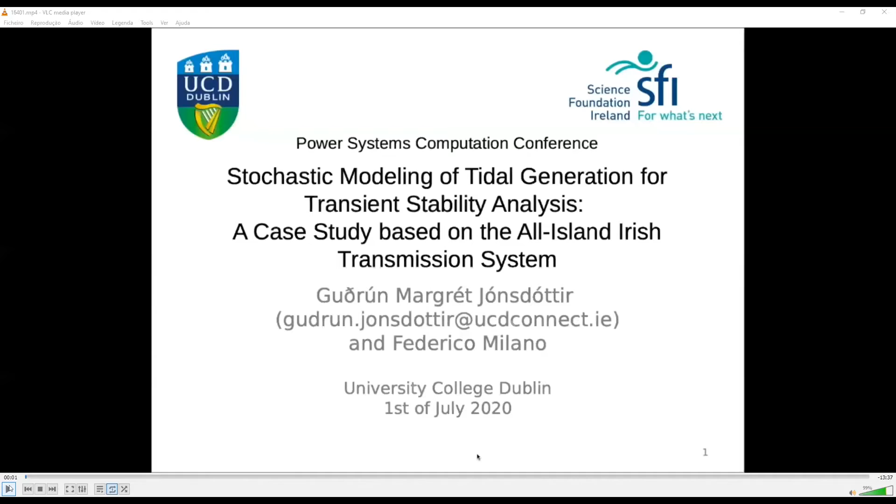I'm Margrét Jónsdóttir, and I'm a PhD student at University College Dublin. Today I'm going to be presenting our paper titled Stochastic Modeling of Tidal Generation for Transient Stability Analysis, including a case study based on the all-island Irish transmission system.

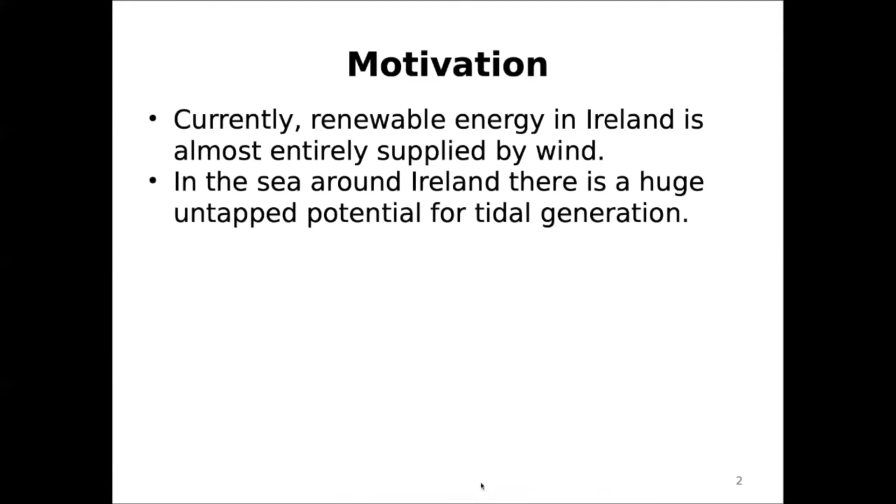Currently, the renewable energy in Ireland is almost entirely composed of wind generation. However, in the sea around Ireland, there's a huge untapped potential for other energy sources, specifically for tidal generation. This brings us to the objective of this paper, which was to provide a comparison of these two renewable energy sources, wind and tidal generation, when it comes to the dynamics of power systems, specifically in the case of the Irish system.

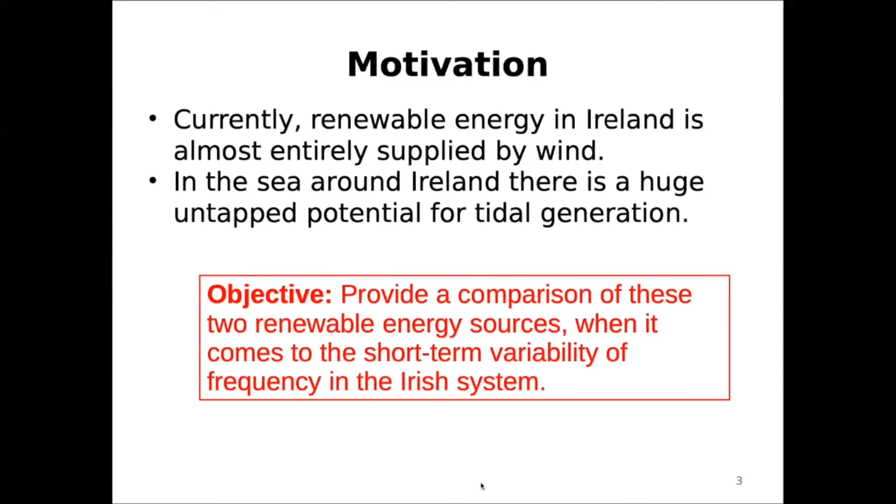Since tidal generation is not that well known, I thought I would start with a brief background on tidal generation. Tidal turbines extract energy from ocean movement due to the tidal phenomena, which is caused by the sun and moon's interactions with the oceans of the earth, causing large bodies of water to move to and from coastlines with periodic cycles. These tidal currents are predictable, very predictable, months or even years in advance, which is one of the driving factors for tidal generation.

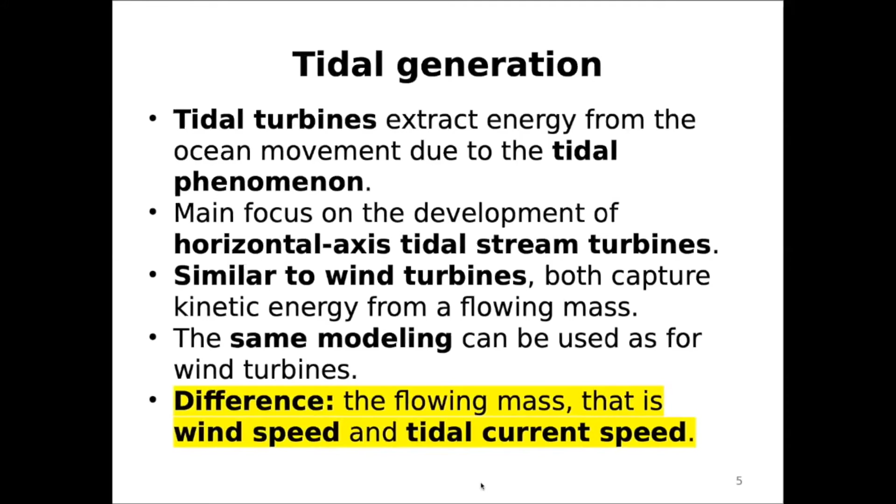Many different technologies for extracting tidal energy from the tidal phenomena have been proposed in the literature, but the main focus of development has been on horizontal axis tidal stream turbines. The driving factor for this is that these turbines are very similar to wind turbines, and therefore can be modeled in a similar way. The main difference for dynamic analysis of power systems between tidal and wind generation will be in the flowing mass that produces the generation, that is, the wind speed and the tidal current speed.

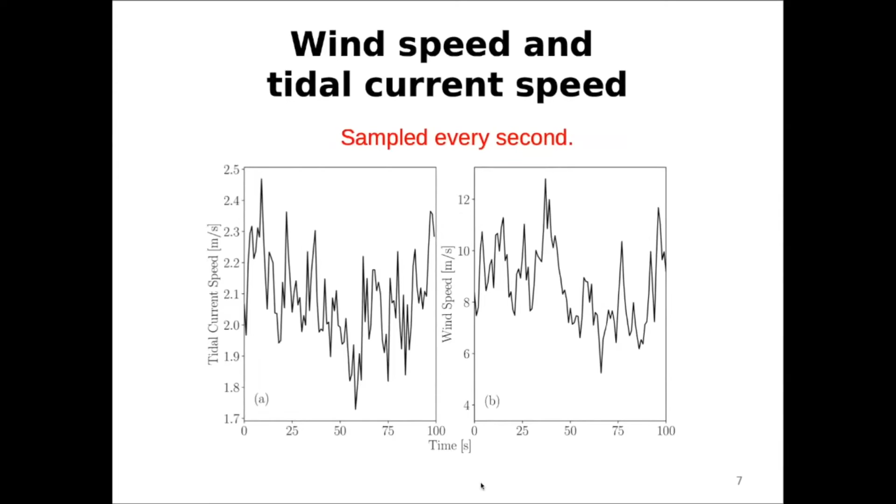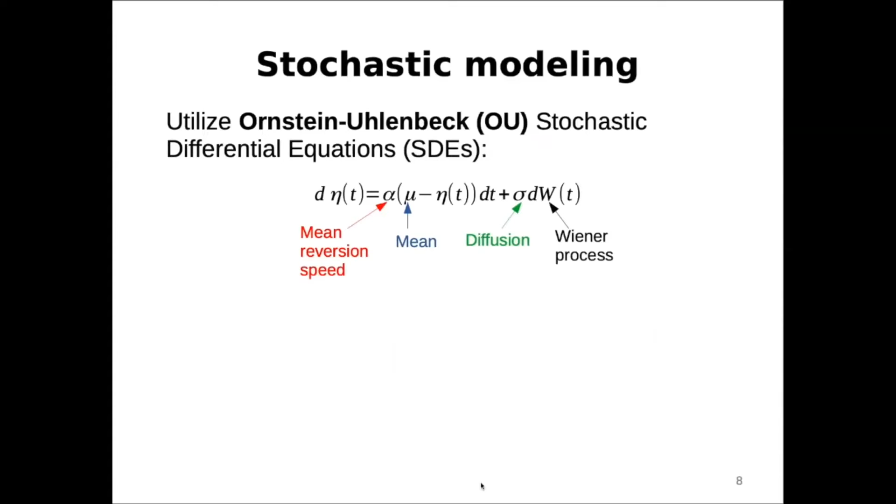This is what we want to be able to model, these short-term variations. For the stochastic modeling done in this paper, we use stochastic differential equations, or SDEs. Specifically, to build all of the stochastic models, we use Ornstein-Uhlenbeck SDEs. An example of an Ornstein-Uhlenbeck process is shown in the equation here. An Ornstein-Uhlenbeck process is mean reverting and Gaussian.

To build more complex stochastic processes that are, for example, a combination of faster and slower dynamics, we use the superpositioning of Ornstein-Uhlenbeck processes, as shown in the lower equation here.

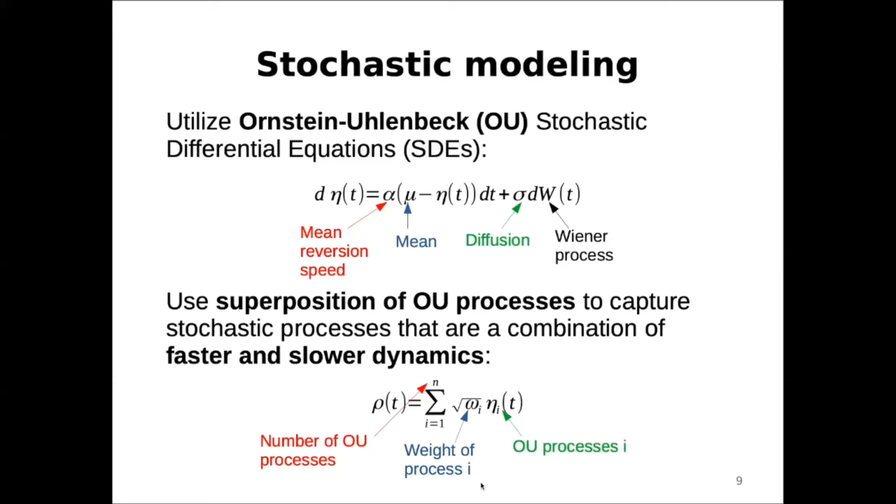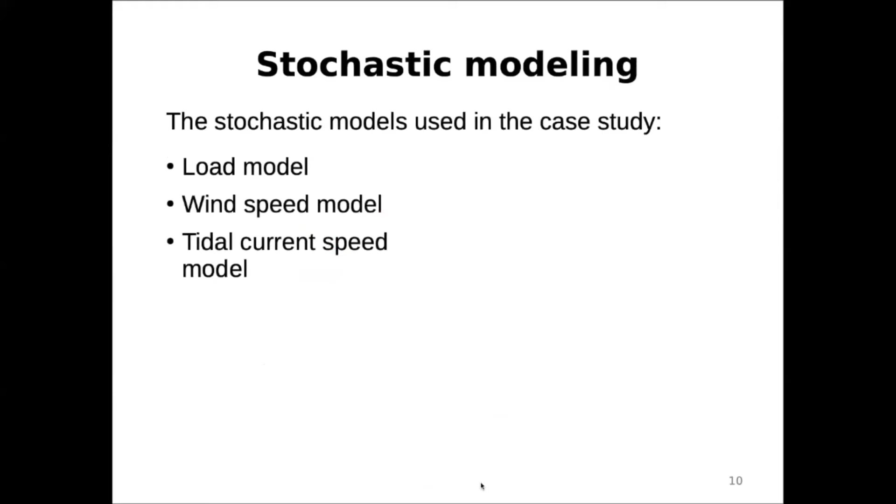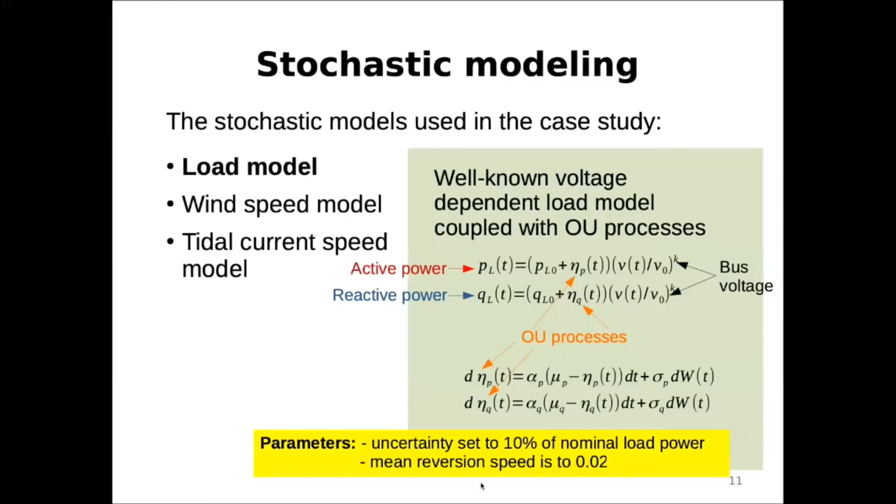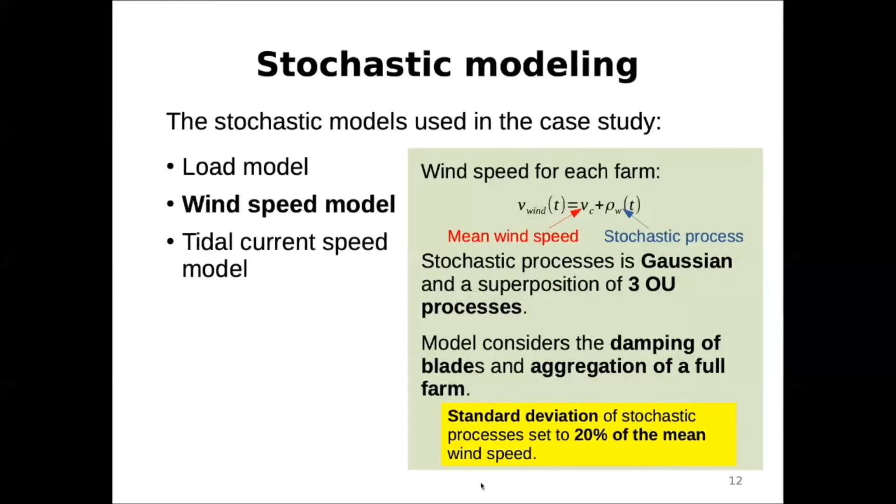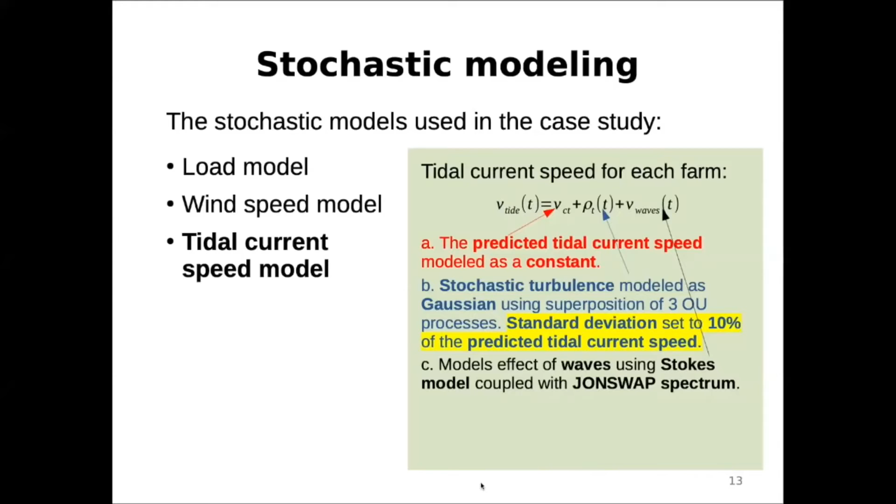Finally, to model tidal current speed, we model it in three different parts. We model the predicted tidal current speed, modeled as a constant, and then we have a stochastic component which models the stochastic turbulence in a similar way as we saw earlier for wind speed. Finally, we have a wave component that models the effect of waves on the tidal current speed. This is modeled using a Stokes model coupled with the JONSWAP spectrum, which enables modeling different wave scenarios affecting the tidal current speed.

For the case study, we use a system model of the Irish system. The Irish system is a relatively small, isolated transmission system with two HVDC connections to Britain. It's operated by two different transmission system operators, namely SONI in Northern Ireland and EirGrid in Ireland.

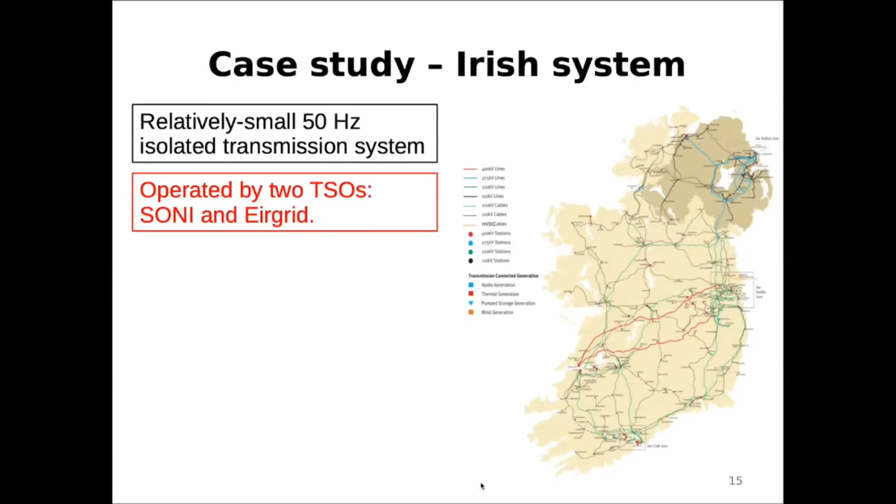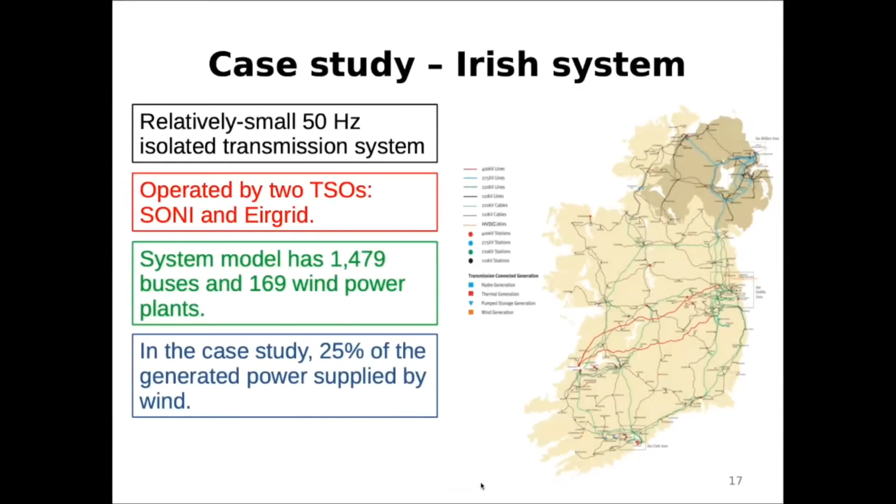The system model we use is composed of 1,479 buses and 169 wind power plants. The wind power plants supply 25% of the generated power.

Now for the inclusion of tidal generation into the system model. Ireland actually had the first commercial scale tidal stream generators located in Northern Ireland as part of the SeaGen project. This project gave very valuable information about the future development of tidal generation in Irish waters.

Then in 2010, a study was conducted to find the potential tidal generation locations across Ireland. Multiple locations were defined, but the locations with the highest potential are the 4 locations shown here, and this is where in the system model we will install tidal generation.

Their combined generation is set to supply 10% of the total load.

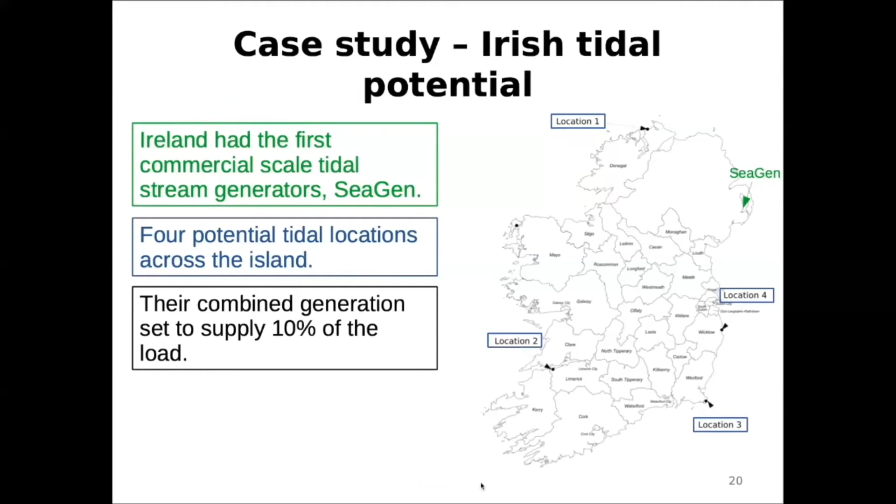For the case study, we consider 5 different scenarios for the Irish system. For the first 2 scenarios, we have 25% onshore wind. But in scenario 1, only the loads are modeled as stochastic, and then in scenario 2, the loads and the wind are modeled as stochastic.

For scenario 3, only 15% of the generation is supplied by onshore wind, and the remaining 10% is now supplied by offshore wind, where offshore wind power plants have been installed in the potential tidal generation locations shown previously. Loads and wind are still modeled as stochastic.

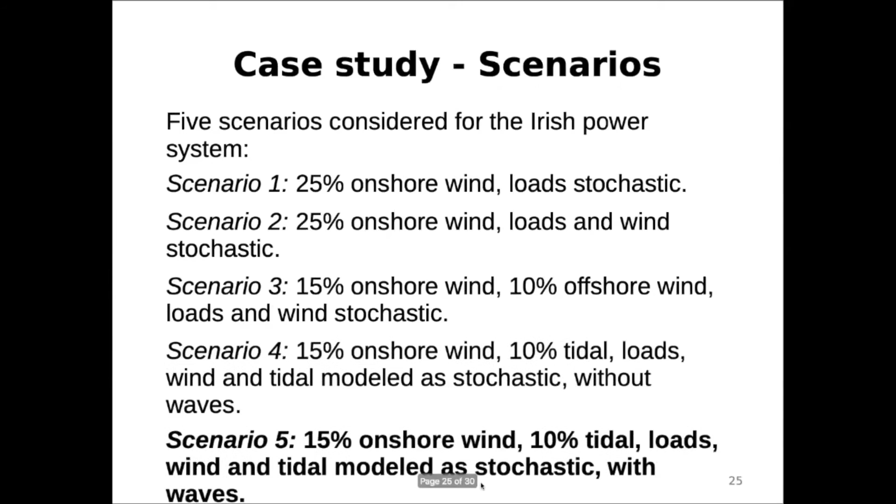Then we have the 2 remaining scenarios, scenario 4 and 5, where we have 15% onshore wind and 10% tidal generation. In both scenarios, the loads, wind and tidal are modeled as stochastic, but the difference is that scenario 4 is modeled where waves are not affecting the tidal current, and scenario 5 is where waves affect the tidal current speed.

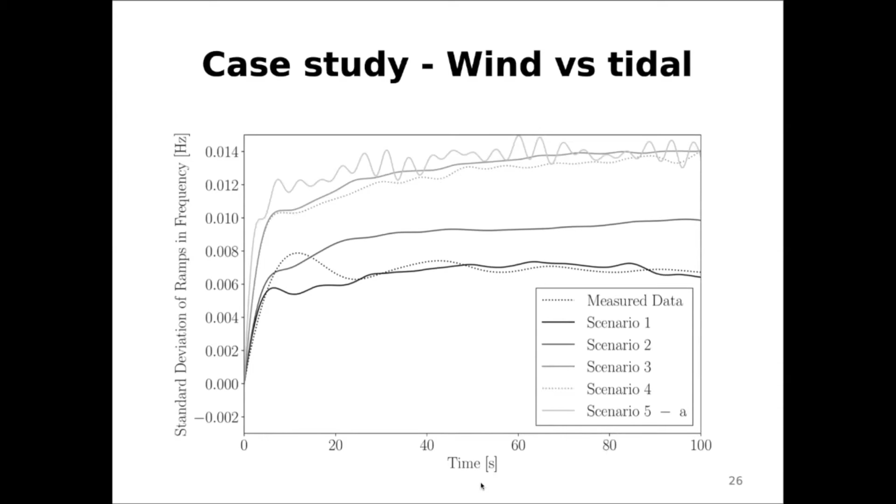That's why we decided to look at more different wave scenarios that might affect the Irish system. All of these scenarios are based on actual measured records of the wave heights and wave periods in the Irish waters. So we have these 3 different scenarios that we consider.

Scenario A, which we also saw in the previous graph, where all locations are modeled with small waves. Then we have scenario B, where 2 of the locations are modeled to have small waves. These are the locations located in the Irish Sea, and then 2 of them with medium waves.

And then finally scenario C, where 2 of the locations are modeled to have small waves, 1 is affected by medium waves and 1 with large waves. And this is the extreme case.

And as we can see, for the bigger wave scenarios, we are seeing larger frequency variations to levels that are not acceptable in the system.

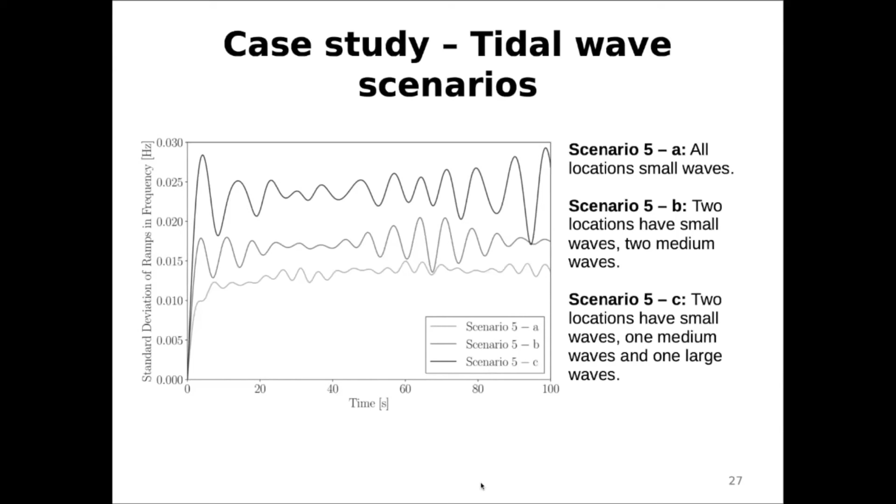And this is why we decided to test installing frequency control of the tidal generation. And again, we utilized the fact that the tidal turbines and the wind turbines are in many ways similar, and we use a frequency control that was designed for wind turbines for the tidal turbines. This frequency control is composed of droop control and rate of change of frequency control.

And we can see that installing this frequency control actually enables us to mitigate the frequency variations due to the waves to acceptable levels. And just for comparison, we also show scenario 2 and 3, which are only composed of wind, and the frequency variations due to the waves are quite close to these scenarios.

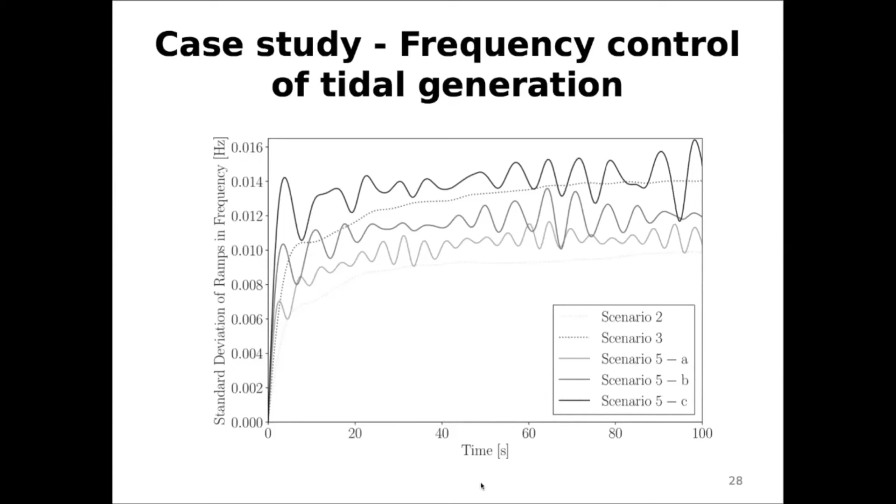And therefore, to conclude, this paper shows a comparison of the effect of wind and tidal generation on the frequency variation in the Irish system. And we see that tidal generation does not necessarily introduce larger frequency variations in the system, except in cases where waves are present and affecting the tidal current. And the frequency fluctuations introduced by these waves can be successfully mitigated by including tidal turbine frequency control.

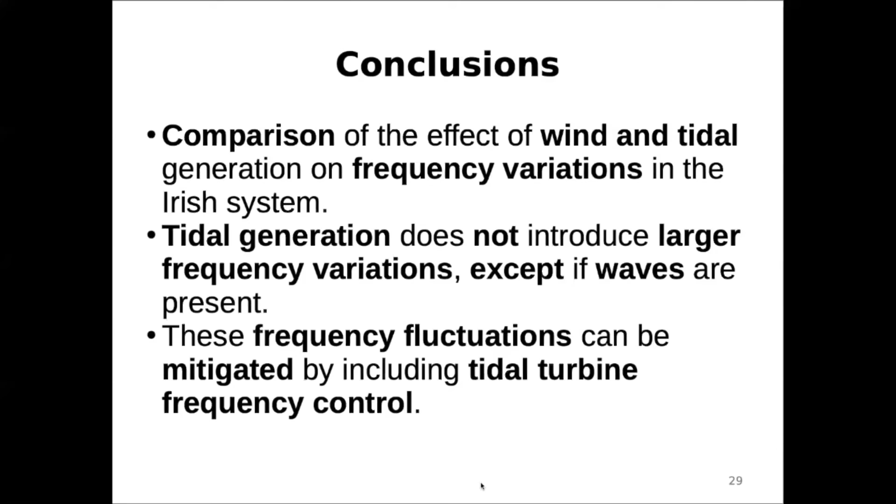So thank you. Any questions?

Thanks, Margrét. Very nice presentation. I see already one question, and whenever it comes to dynamic models and dynamic behaviors, I know that Petros Aristidou is always interested into it. So he has a double-part question. If you would like, I will read it, and if you would like to respond to it.

So I saw it. Okay, but you need to read it loudly. Yeah, you can just read it if you want. Yes, I will read it.

How were the tidal location and their parameters used in the SDE identified? So this is the first part.

I think I will answer the second part as well, because of the wave conditions. So the second part is, is there a study or historical measurement data available?

Yes. So the SDE models are actually identified based on measured data from the MeyGen test site, which is actually in Scotland, north of Scotland. But the wave scenarios we consider are based on wave measurements, just like the historical wave scenarios in the seas around Ireland. And that is referenced in reference 25 in the paper.